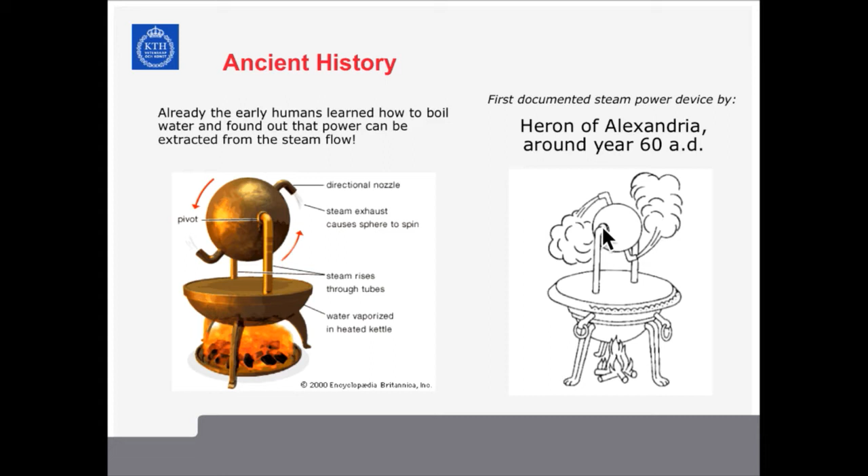The first documented device that was running on steam, even if being only a toy, was a kind of a rotating sphere around year 60 after Christ in Roman Egypt, which was, well, you can imagine how it works. Water boiling, rising up through these brass pipes into a brass sphere and using a kind of a reactive force jetting out and rotating the sphere.

There was no really mechanical work, positive work, so to say, done by this device, but being the first documented one, it shows that people tried in practice to manufacture a device that was able to run on steam. Again, what kind of materials are being used, sustaining the high temperatures, being able to contain boiled water and to send the steam without leakages into a moving device was a critical issue.

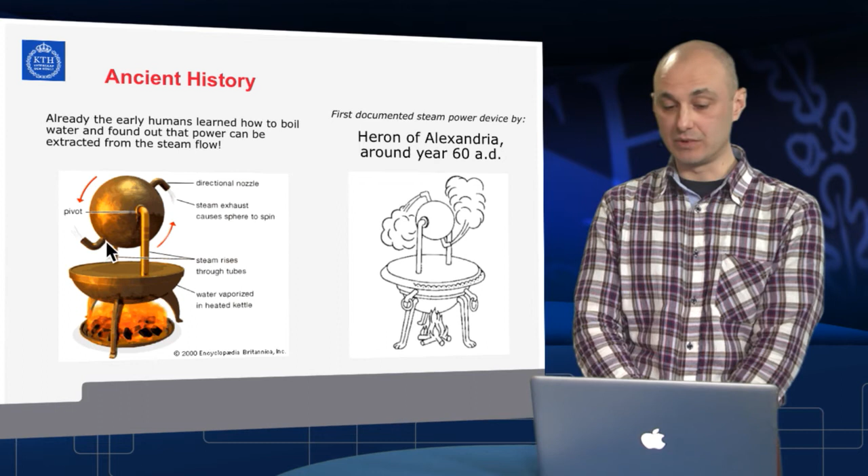Then we come to where our modern age really started. That would be the Industrial Revolution in the 1600s, 1700s, towards the middle of the 19th century. The first big, actually the biggest thermal machines in the old days were those, let's call it, first phase steam engines. Their purpose was not to produce power really. Their main application was to pump water, to drain water out of mines in most cases.

And the first such big engine was used in England, the so-called Thomas Newcomen engine, around year 1700, which was pretty simple. Now imagine, we're talking about more than 300 years ago, when it was very difficult really to produce a steel cylinder. This was a cast iron cylinder operating at atmospheric conditions. It was not even pressurized, not to mention any kind of proper sealing.

It was boiling water at more or less atmospheric pressure, and saturated steam was sent to the cylinder here, the main action piston, where vacuum power was used. So cold water was injected by the auxiliary pump into the cylinder, forcing the steam to condense, producing suction or vacuum, which was the main driving force for the pump.

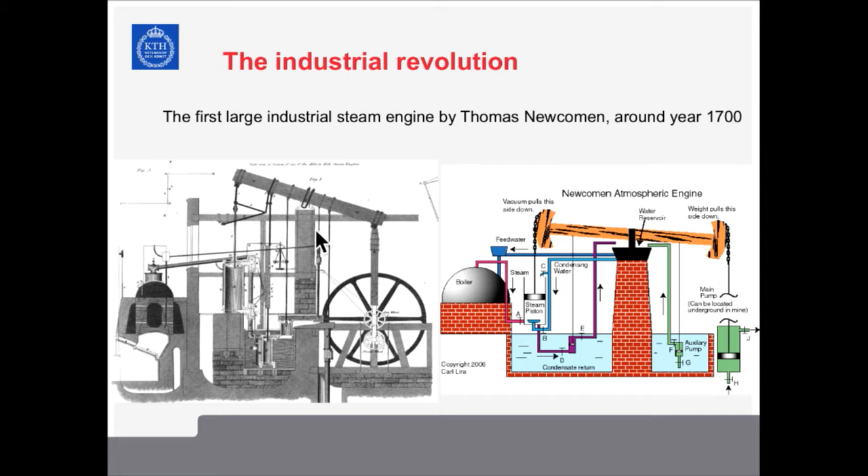These machines actually started the development of many other areas of engineering, and some of those would be, first of all, control systems, mechanical engineering related to materials, and other operational issues connected to automating this machine. The very first such machines needed manual labor: there was a person sitting somewhere here operating by hand, opening and closing the valves.

So it took a while until people found out that it is, well, not easy, but possible to link all those valves with some kind of levers. So they operate automatically. They are opened and closed by the machine itself, connected directly to the motion of the main piston. This was the start of automation engineering, actually.

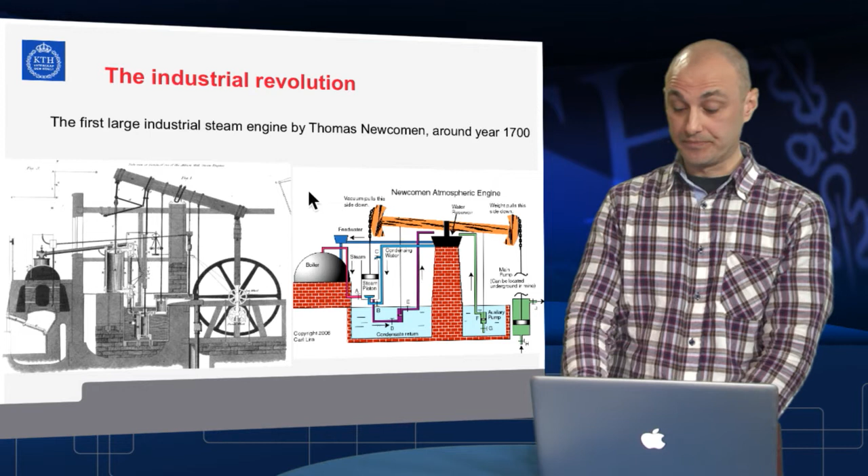Throughout the years, our modern time started with those big steam engines. Everything we have today was initiated by steam power. Steam traction in the old days, locomotives, and later on also ships. Also steam engine driven workshops and factories. Everything was steam driven up until the beginning of the 20th century. Usually in a typical workshop or factory, a central big steam engine was running all the tools with the help of belt drives or other kinds of arrangements.

The first real power plant, driven by a steam engine quite the same as the steam engines in the locomotives, was constructed in year 1882 by Edison himself in New York and London. It had an electrical efficiency of about 6%, quite the same as for the typical steam locomotive.

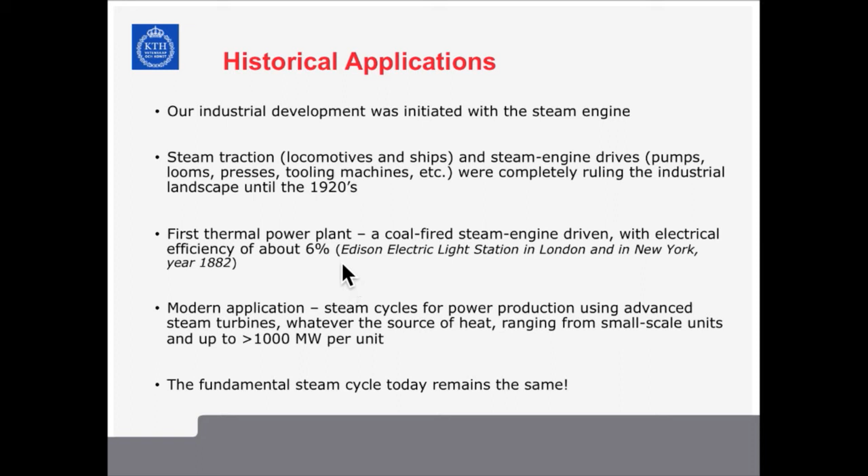Starting from this poorly efficient cycle and ending up with modern power plants usually more efficient than 40%, or even if you use the cheapest and simplest possible materials, you would still be above 30% efficient. It took some time and development, and there is room for continuing this development even further.

In the modern world, approximately 90% of all the electricity being produced today is actually produced by thermal cycles, where a steam cycle or thermal power plants, where the steam cycle is the main driving engine. Regardless of the fuel, it could be a fossil fuel powered plant, it could be a biomass or any renewable fuel fired plant, it could be even nuclear or even fusion nuclear. It still is a steam cycle, especially in large scales, that would be actually converting the energy.

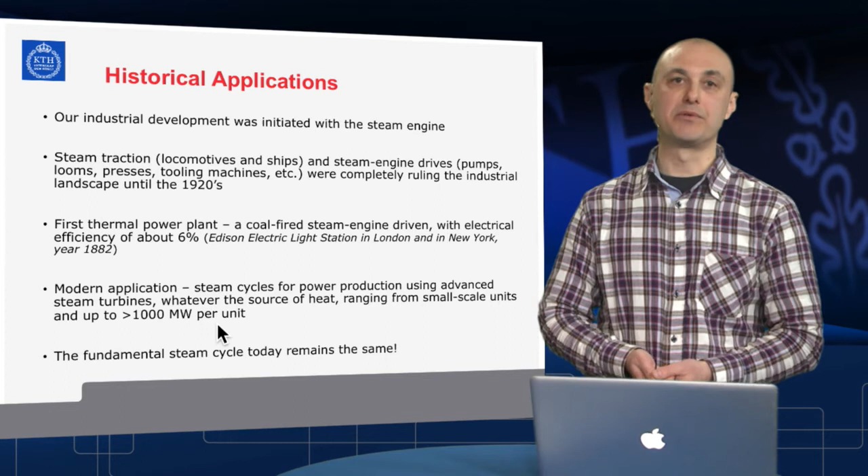From several megawatts, the smallest practical steam units, up to beyond 1,000 megawatt per unit. The fundamental steam cycle, the fundamental concept actually remains exactly the same as 300 years ago.

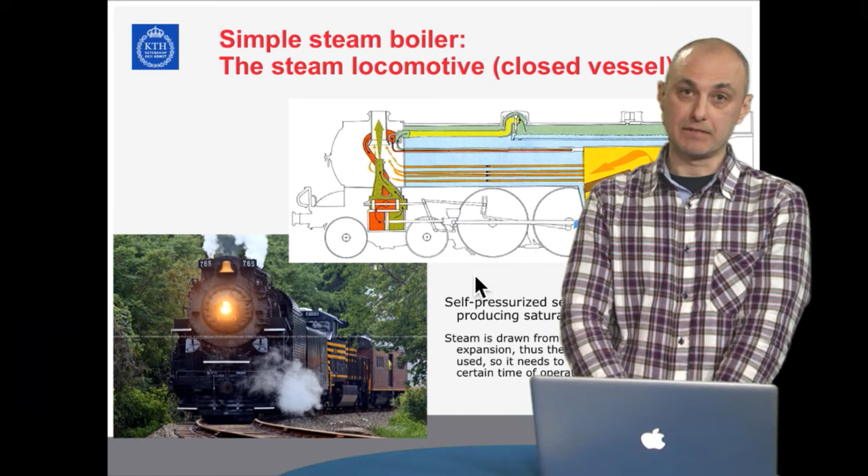It is very interesting to look at the simple steam boiler, which can be represented by the steam locomotive. These beautiful pieces of engineering from the old days, which were actually the biggest thermal machines ever built by people 100 years ago, and were indeed in practical use until the middle of the 20th century in certain corners of the world, including Europe, they are quite forgotten these days. It is a bit difficult to find the blueprints if you want to renovate a steam locomotive, even if we have quite many of those sitting in museums.

They can be regarded as a typical closed vessel type of steam boiler, which is the simplest system you can imagine. Filling in a cylinder with liquid water, not to the top, but allowing a certain vapor cushion at the top position here, sealing it, closing it as good as possible, and then heating it up. What would happen? Well, pressure will build up inside the boiler, which is directly linked to the temperature of the boiler. Now, it's producing saturated steam. The conditions inside the water vessel are saturated.

Depending on the heating rate, there would be pressure building up inside the cylinder. And a good rule of thumb, that was exactly the pressure at which most of the old locomotives were operating at, that would be 10 bars, so 10 atmospheres. This means 180 degrees in the water tank.

The fireplace is quite simple. It doesn't matter really how it looks. Air taken in under the grate and through the opening. The machinist here shoving in coal. A common combustion occurs inside the furnace, and the exhaust gases, the hot gases, passing through a range of pipes, pretty similar to the modern fire tube boiler, the so-called fire tube boilers, then being exhausted through a chimney.

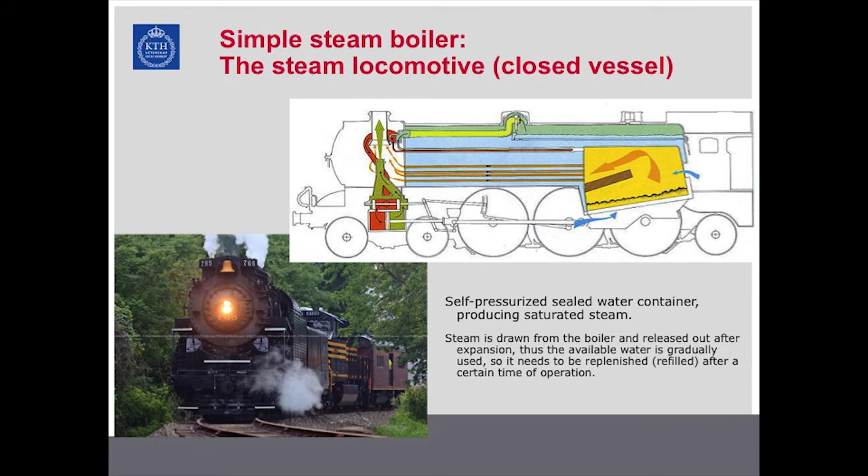Water is boiling inside, producing saturated steam, which is drawn from the top and sent in through one of those exhaust gas pipes, attempting a slight superheat. The slightly superheated steam is then transported to the main action cylinder, which can be manufactured in different ways. This example here is like a double action cylinder, taking in the slightly superheated steam on both sides,

reciprocating or acting one after the other, and then allowing it to expand and releasing it without condensing, then getting rid of the steam, mixing it with the exhaust gases more or less in the same chimney, and releasing it to the atmosphere without condensation. This means that the working fluid is being lost. It's being used throughout the cycle. So some kind of replenishment or refilling the cylinder is needed. And that's how the locomotives were operating.

At the next major station, you stop the train, you fill in the whole cylinder with water, you heat it up again, it may take several hours, and you continue the ride. Leakages, of course, occur everywhere in the system. It was very difficult to run such kind of a piston machine with steam, especially steam that is partly condensing inside. And of course, the arrangement of the piston rod and the whole crankshaft concept was quite simple in the old days, but it was operating quite reliably.

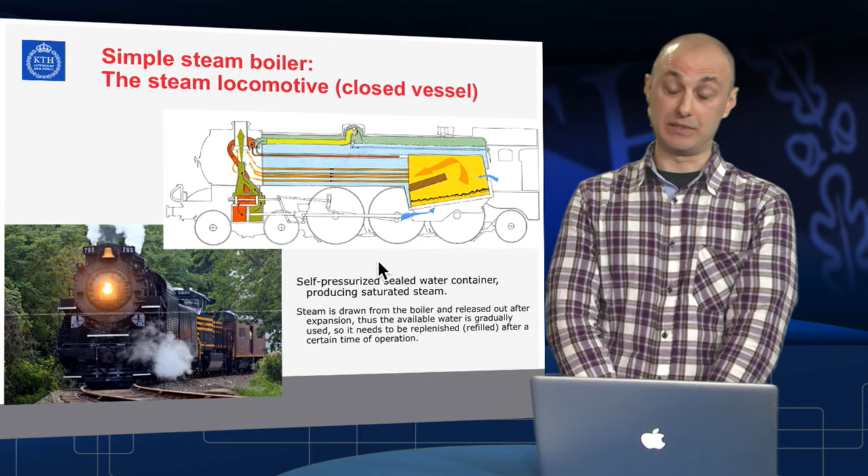The modern steam boiler does not operate as a closed vessel. We can rather regard it as a continuous circulating system. It's a continuous circuit where the working fluid, in the best case, in the ideal case, is not lost. It circulates continuously through the system, and the pump, the feed water pump, is the main component governing the pressure. The pressure in the boiler is controlled completely by the feed water pump.

The steam boiler, again, is burning some kind of fuel, doesn't matter what kind it is, transferring heat to the steam, boiling the water, and attempting to superheat the steam as much as possible, sending it continuously to an expansion device. In the modern concept, that would be some kind of a steam turbine, definitely not a piston device, then condensing the steam in the end back into liquid and recycling the fluid.

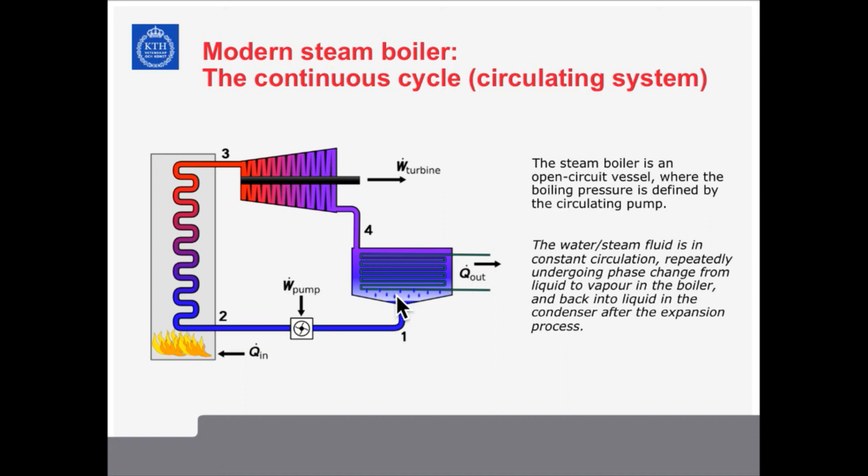The working fluid is not lost in the best case. It circulates continuously through the cycle, being evaporated at one end, expanding, thus producing work, and condensing back into liquid in order to be recycled in the other end.

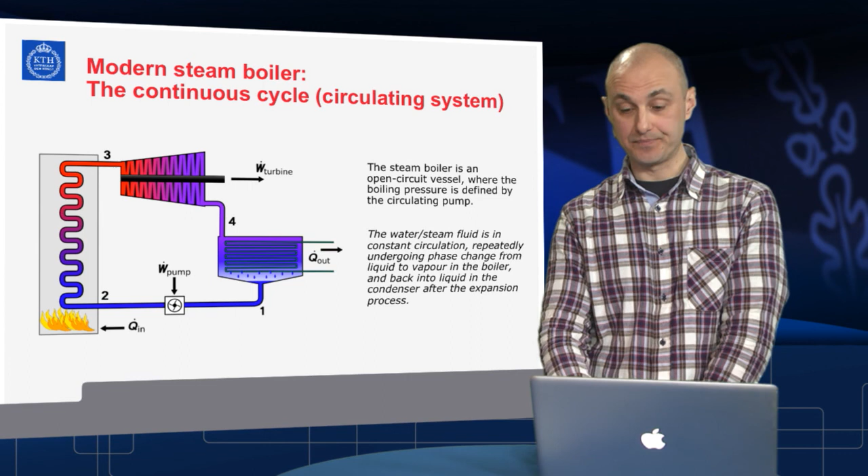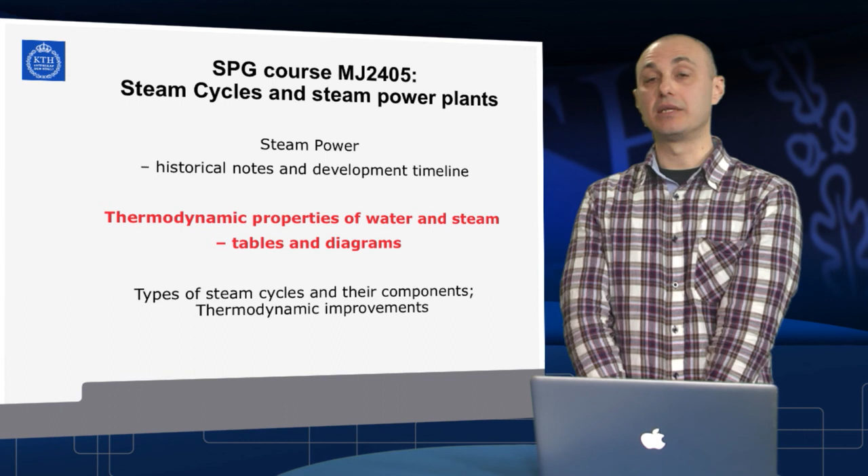This is the end of the first section. We will continue with the thermodynamic properties and the main features of how we represent steam cycles in tables and diagrams, and how exactly they operate in theoretical terms.